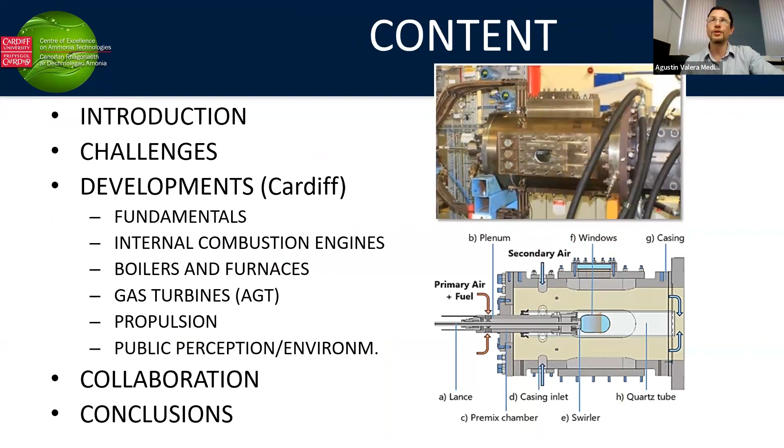So just to give you an insight into what we have done, you have all these lists of things. If you have the time, interest, and will to do some reading, go ahead please. This is some of my background and the work that we've been doing on ammonia.

One of the things I keep reminding the audience is that ammonia is used for salts, and NFL players and weightlifters tend to use it just to stay awake. So probably if you have any nearby and you're falling asleep, just go for some and have a sniff of ammonia to wake up. For those of you that probably didn't know, this is something going on. It's quite interesting how it apparently boosts the energy and stamina in these different groups, NFL especially, to carry on with the work. So yes, ammonia has lots of attractive and interesting features.

Starting with the introduction, we go back to why we're doing all this. We've been talking about renewable energies as a way to decarbonize and reduce greenhouse gas emissions, but we know these sources tend to be intermittent in nature. To give you an example, a few years ago we had a big blackout here in the UK affecting almost 1 million people in the middle of the day. The reason was we were running around 48-50% wind power. There was a problem with the wind turbines and connectivity, and that amount of people in the Midlands lost power. Similar situations keep happening everywhere in the US, Australia, Asia, etc.

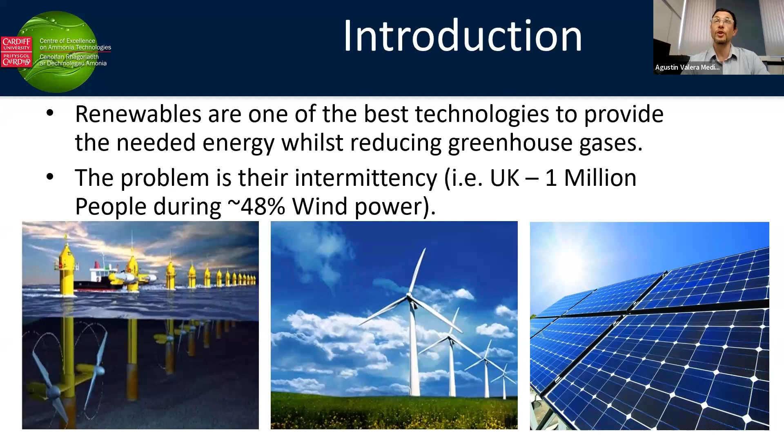So it takes us to the point that we need some way of storing that energy. There have been a lot of methods proposed over the years, some commercial, some fundamental in nature, but there's one that is critical for any kind of mixture we'll have for the future, right now and in the near and long-term, and that is chemicals. The reason is we've been using chemicals for hundreds, if not millennia of years - we're talking about oils, methane, natural gas, and now these days the topic is hydrogen and potentially ammonia.

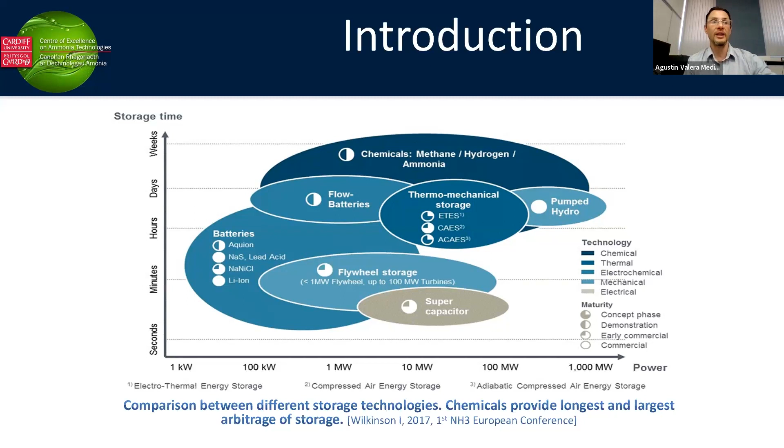Looking at this graph developed by Siemens a few years ago, we can see how storage time, when talking about these different potential technologies, goes from seconds to weeks, and as I mentioned, in the case of chemicals, even beyond that - years, centuries, etc. The same goes for the amount of power they can deliver - not only small power, 1 kilowatt, but actually gigawatts that can be delivered, as we know in power stations and large systems that provide us with the electricity and energy we require.

Now, one of the things I always try to bring up is why ammonia, and then comparing it somehow to what is going on with hydrogen.

This analysis was done in 2021 by the Hydrogen Council, looking into what was the best energy source based on location. In the map on the left, you see the areas with lots of presence of natural gas across the globe. It's not everywhere, but we know there are still some points to tap into these sources.

Different to the case of renewable energy, where we have photovoltaic and wind resources shown in the upper part of the graph, those resources are almost limitless and can be recovered from every location on the planet. And this is just photovoltaics and wind - we're missing marine energy, which has a lot of potential as well in many locations that are near islands or sea locations.

Based on that, and thinking the way forward is going into green hydrogen, one part of the study was looking into how we're going to move that hydrogen. The study focused on three different ways to move it: ammonia, liquefied hydrogen, and liquid organic hydrogen carriers.

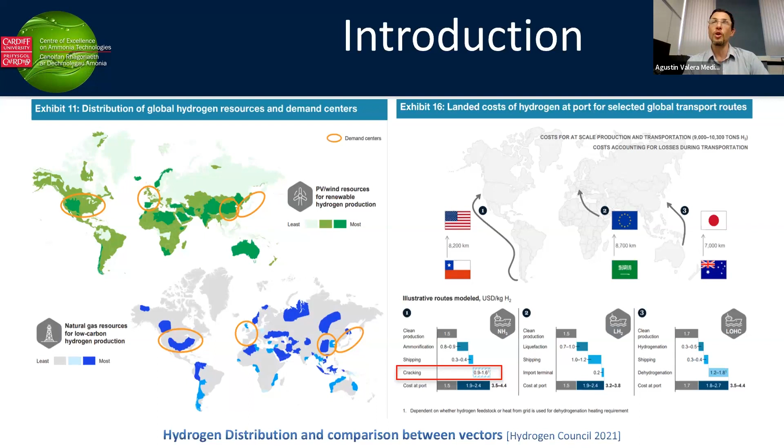But there's one component that makes a whole difference: if we manage to reduce the cracking cost of ammonia - which is almost a third of the total cost of moving hydrogen this way - then for cases where we need to move hydrogen long distance, ammonia becomes the most economic solution of the lot.

That's the reason we present ammonia as a potential method to move hydrogen, a hydrogen vector. Not only because it reduces cost over long distance, but also because we can recover it via renewable sources, and we can recover it using rescued stranded resources from waste streams.

One very interesting thing is that when we talk about long time or long distance storage, the cost of having ammonia compared to cryogenic or pressurized hydrogen is almost 26 to 30 times cheaper. In the same way, we can employ it in islands or isolated locations off the grid.

We can use it as a fuel, as I'll show in this presentation, and we've been using it as a fertilizer for over 150 years. It has more hydrogen than hydrogen itself, because the ammonia molecule has 3 atoms of hydrogen compared to the 2 atoms in the hydrogen molecule. Finally, we have a very well-developed infrastructure, built up over 150 to 180 years, that moves around 184 billion euros annually.

On that line of thought, there have been lots of different methods and materials analyzed to move hydrogen, as you can see on this graph. At the very top right of the screen, where we have ammonia, either refrigerated - not cryogenic, just minus 30 to minus 40 degrees Celsius - or slightly pressurized over 10 bar at atmospheric temperature, it's one of the best methods available to move more hydrogen, again with the versatility of a lower cost.

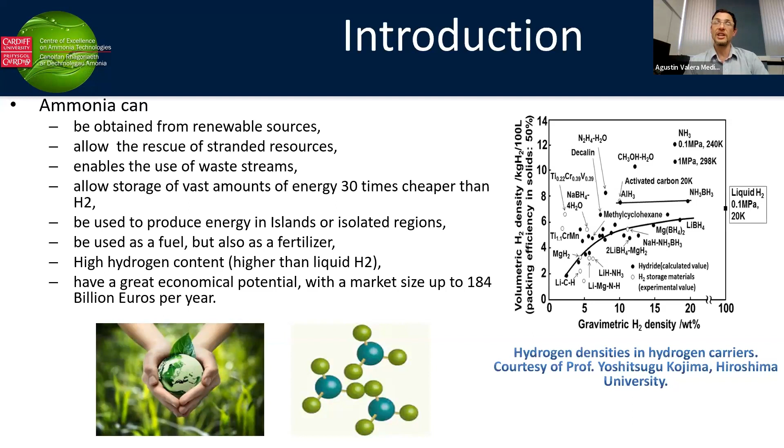There's been a lot of talk about how we're going to manage to produce all this hydrogen, convert it into ammonia, and make it a feasible part of this hydrogen economy we've been talking about. Right now, we're mainly relying on production of ammonia and hydrogen via steam methane reforming. But the next generation, which will start production in the next couple of years with companies like Yara, CF Industries, etc., is looking into producing this green hydrogen via renewable energy.

So we can use electrolysis to produce the hydrogen, and using air separation methods for the nitrogen, put it into reactors in a process called Haber-Bosch, and finally produce the ammonia that we need for fertilizing and now fueling applications. That's what some scientists call generation 2 ammonia.

But there comes a third generation that people are starting to investigate, called third generation, that essentially will start working with surface reactions, fuel cells, lithium-based materials, etc., where we'll have the combination of both water and air, using energy coming from renewable sources.

It won't require the electrolysis of water or the separation of nitrogen, and because of the affinity of these materials with hydrogen and nitrogen, it will produce the ammonia straight away, meaning that anyone in the world, as long as we have water, air, and electricity, will be able to produce ammonia, and from there, the hydrogen that we require.

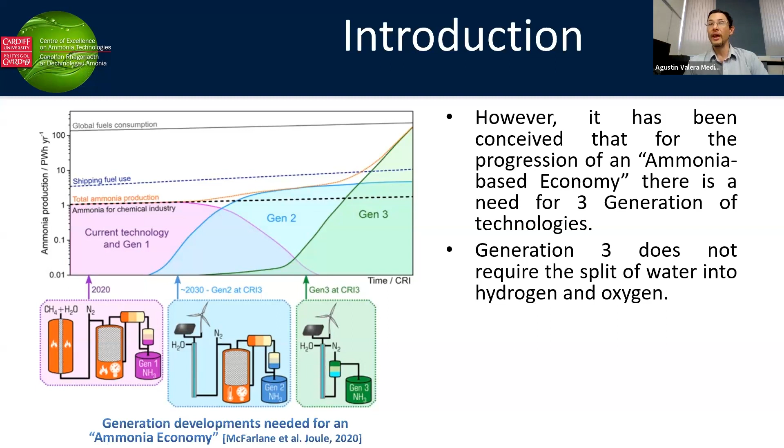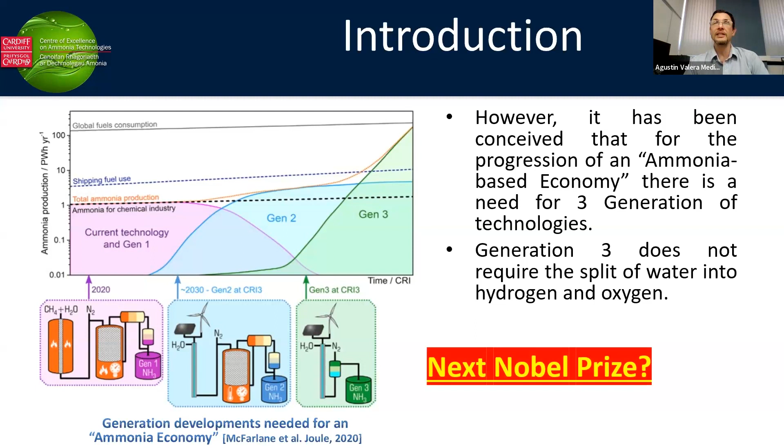So it's probably going to be the next Nobel Prize, as this already has 2 Nobel Prizes in its belt, with the Haber-Bosch process, and it's very likely that if we manage to do that, anyone will have access to store and then utilize ammonia as a hydrogen vector.

For that reason, there's a lot of work going on in different areas. For example, in our case, we've been working on thermal systems. And one of the things I want to point out is, again, this is going to be part of the final solution. It's not going to be the final silver bullet that solves all our problems. It's going to be part of that.

So if we have renewable energy or methane reforming, then that renewable energy probably fits into the grid, providing us electricity for driving cars. Or if we're using fuel cells, potentially providing that hydrogen we can use straight away close to the sourcing point. But if we need to move it around, ship it, and send it long distance,

like in cases in the US where there are long distance pipelines, then it's probably the best way to do it via ammonia. And if that's the case, we need to consider how we're going to employ it for transport, heating, cooling, process industry, propulsion, or stationary power.

But still, there are many things we don't know about and need to investigate. Some of them are related to reactions and combustion, how the addition of nitrogen is going to impact emissions, how it's going to impact the production of this energy via these sources.

We are finding out, as I'll show you later, that there's some nitriding combined with embrittlement when we start using ammonia for these purposes. Public perception is going to be a big one, because people need to understand how this is going to affect them, how they can utilize some of these systems, and be aware of the potential risks that ammonia will bring.

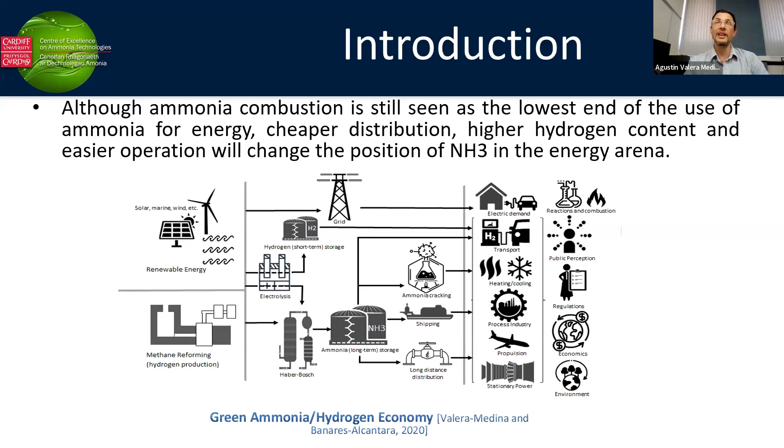Regulations, there are none, again when it comes to fueling. They've been talking about this for some time, but in the international arena, there's still nothing available. Economics needs to be profitable, and finally the environment needs to be addressed as well, because we'll be dumping nitrogen somewhere that we didn't capture, and same thing with water. So how is that going to affect the environment? And again, think that we're talking about gigawatts of power potentially being produced using this vector. So that's something that needs to be addressed.

Along those lines, looking into why ammonia, one of the things we always tend to mention is its energy density compared to hydrogen. Per liter and volume it's obviously higher. And when it comes to long distance, long period storage, it makes sense compared to the case of pure hydrogen.

So shipping, rail, heavy duty lorries will probably be fed using ammonia. But again, as I mentioned, it's not going to be the silver bullet that solves everything. It's going to be just one addition to this hydrogen economy. So hydrogen is going to be there.

So along those lines, some analysis that's been done looking into the use of hydrogen and other vectors, done by the University of Louvain, tried to demonstrate that by renewable energy production and then passing through all the different processes of electrolysis, storage, and efficiency of a final engine, the case of ammonia was very tempting.

You can tell from the comparison between methanol and methane that ammonia is actually quite close in terms of final efficiency. What is the main problem with hydrogen? Again, it goes back to cryogenic storage. If we're avoiding that part of the component analysis, obviously that final percentage comes much higher.

It just doesn't make sense to convert the hydrogen into ammonia. But if we need to move it around and store it rather than going cryogenic, we can go and produce some ammonia.

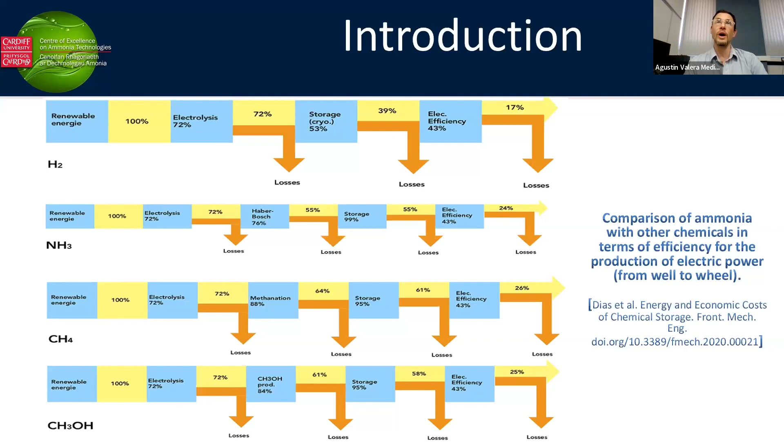Finally, some analysis done by the University of Minnesota, addressing what would be the best scenario to employ either hydrogen or ammonia in different places across the US. So they compare three different scenarios: one hydrogen, the other ammonia, and finally a combination of both.

Based on the location of the city, say for example Minnesota or Wyoming, in the Midlands and central part of America where you have more resources for farming, ammonia makes more sense than having probably pure hydrogen. Whereas if you're next to the coast with an offshore wind production system for hydrogen, then hydrogen could be the best option.

So they address that depending on the location. And you can tell that based on that, some locations were more prone to be efficient or lower cost when it came to ammonia or hydrogen.

But when they combine both of them, it was the best scenario possible, because what happens is that you reduce your capex, your capital cost involved in producing the ammonia, so you will require less ammonia at the same time that you require less infrastructure for the production of hydrogen.

Having a combination of both, then selling additional ammonia and using that for storage, and employing hydrogen directly in systems that can use it instead of reconverting it into ammonia and then back into hydrogen, made the best economic case.

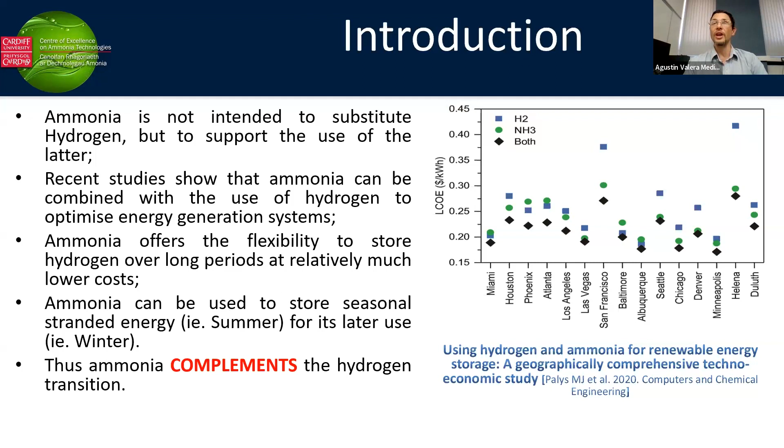So a beautiful and very interesting analysis, which means that if we use that ammonia for, say, seasonal storage, or we have stranded energy, then potentially it's the solution to complement hydrogen. So the way we see it, both of them will complement each other, and that will make for a lower cost of the existing technologies we have at the time.

On those lines, the International Energy Agency in 2018 finally addressed ammonia as an energy vector. Before that, if you go to 2017, 2016, etc., you won't see anything related to ammonia apart from fertilizing. But in 2018, it was finally addressed as one of the components of the energy mixture we'll have in the future.

Many different agencies across the world have been taking this rationale and jumping on the train of ammonia as part of the energy mix. It's starting from the Japanese, who have invested in a very large program working on ammonia, and the same here in Europe and the US. We know Australia is one of the big players, and now we're hearing from developing economies like Chile, Morocco, India, etc., moving into this similar scenario.

So along those lines, we have different ways to use it. Once we have produced the ammonia, we can employ it in fuel cells, can be used as well in internal combustion engines, especially for heavy-duty processes, combined cycle gas turbines, and finally furnaces and boilers, which have shown the best demonstration and the largest efficiencies of all.

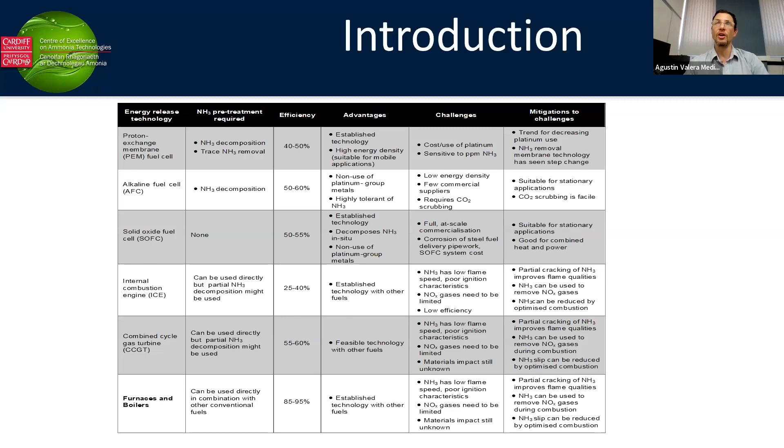But we have challenges. The challenges are mainly four. First, we need to produce it carbon-free, and there needs to be a cost reduction and efficiency improvement, because at the moment the production of green ammonia is still very expensive.

As we have it the same way with green hydrogen, green ammonia, because it comes from that green hydrogen, is very expensive. One of the most expensive components of the total system is obviously the electrolyzer, and then the Haber-Bosch process is just a regular process that can be employed from fertilizing industries. But it's that cost of hydrogen that still makes an important impact on the cost of the final ammonia product.

Power generation at utility scale needs to be stable and low emissions. We are still facing the production of NOx emissions that I'll mention later. They are not that bad. Actually, some of those are within the threshold. We're talking about high power outputs, but still we need to bring that down even further.

Public perception and acceptance is a major barrier because people keep conceiving ammonia as a toxic chemical, that it is. But then the thing is that we've been working and using it for over 150 years, and many refrigeration systems are now running on the use of ammonia. So we know how to handle it.

Problem is that it's not for everything. It's not going to be fed into pump stations where everyone can have access to it. It will require training, will require acceptance, and then community engagement to actually make it happen. The economics, as I mentioned, need to be profitable. Otherwise, there's no way around these technologies.

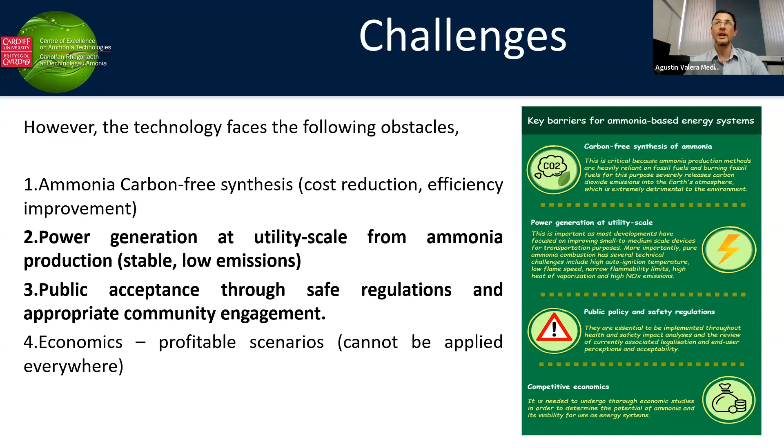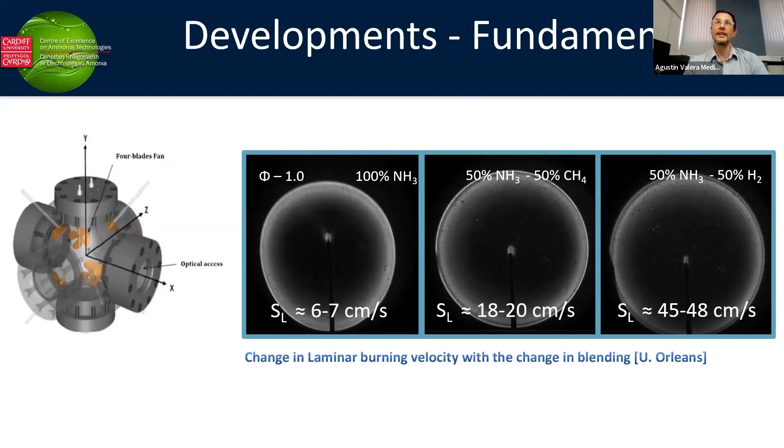How are we going to then input hydrogen from that ammonia? Well, cracking the ammonia. So if we crack the ammonia, we can then recover some of that hydrogen and then use it to then boost the properties of pure ammonia. So instead of having something that is very dull and slow, we can have something that is close to what is natural gas.

Along those lines, there's been loads of research looking into how we can then analyze and understand the reaction mechanism using ammonia and ammonia blends, and the work that is out there is massive. Just to give you an idea, some of the things that we have been doing, look into the analysis of 86 different reaction mechanisms that contemplate, to some extent, ammonia combustion.

But the problem is that we still find that many of them don't provide reliable results. So they work nicely under the conditions that they were generated or designed for, but then when it goes outside of those conditions, then everything starts going bad.

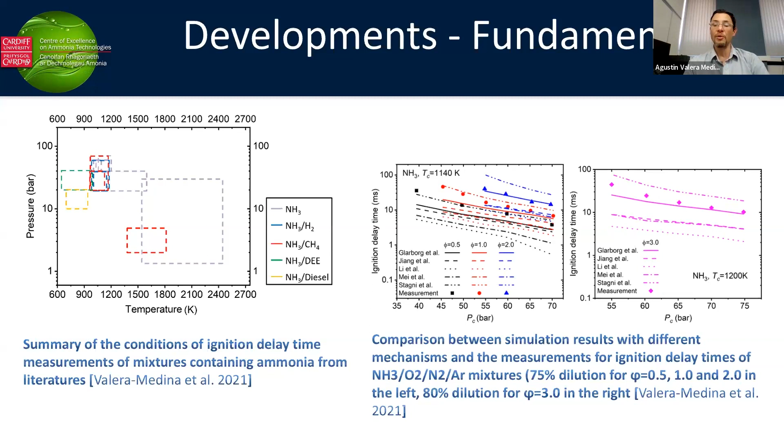So some of them will be really good. Some others will just go and then provide zero correlation to what experiments are providing. So again, it's just a very interesting, nice area of research where we have loads of different researchers working on as we speak.

Similarly, one of the things, as I showed in the propagation of these flames, is how would be the impact of hydrogen as we add it into ammonia. So one of the things that people have been experimenting on is this propagation of the different flame fronts. And as we start adding hydrogen, then what will start happening is something called hydrodynamic instabilities.

And you can see how the change in the bubbles that we had at the very top with very low amounts of hydrogen are very nice, consistent, and propagate in a uniform form. But then as we start increasing the hydrogen content, then what will happen is that we'll produce wrinkles along the flame. And those wrinkles are going to then propagate and produce loads of instabilities that can potentially lead to the hydrogen taking over the flame.

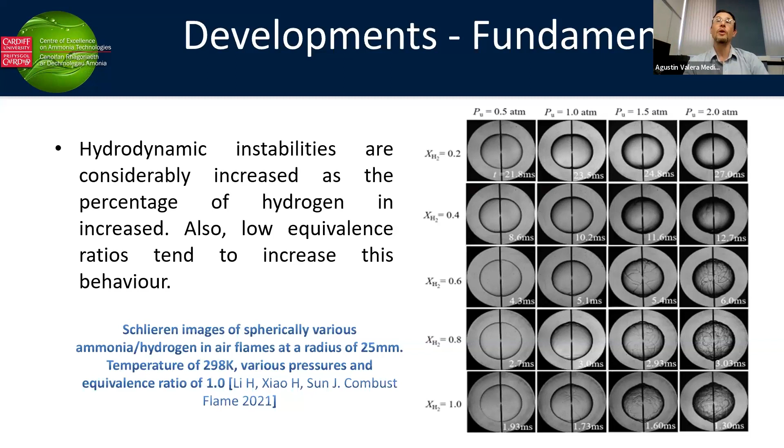And if that's the case, it's very difficult to control. We'll have lots of different issues that will impact on what we call instabilities. So the instabilities will be the propagation of the flame inside of the combustion passages. So as we start adding more hydrogen, then what will happen is that we'll just flashback, and then that potentially can lead to disaster.

Now, another thing that is really interesting is that once that we start adding more or less ammonia, then the flame will change because of the radical formations that we'll get. And this is something that is very tangible, as many people have been looking into this propagation of different flame fronts as, again, the change of the radical formation. So on my left, you have all these analyses using different amounts of ammonia. And when we have zero ammonia, we have a nice bluish flame as the ones that we have in our ovens or equipment that we use with natural gas.

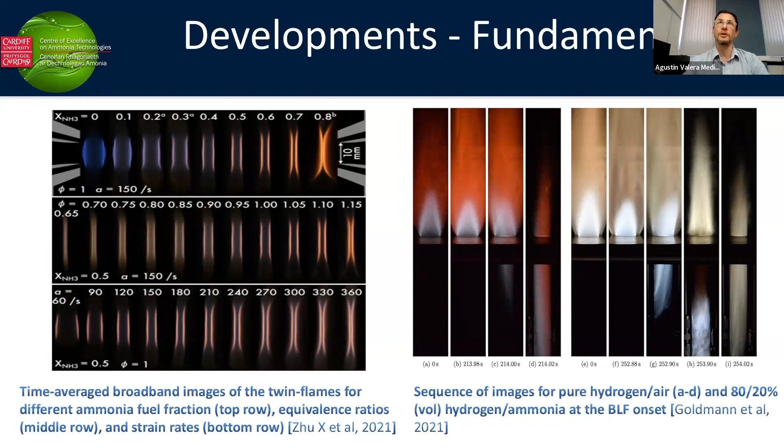But as we start increasing that ammonia content, it will go more into the orange spectrum because of the radicals that we're forming. Those radicals, we need them to finish the combustion and provide enough reactions to annihilate the NOx that we're producing. So that's something that has been studied.

For example, we have a very good collaboration with the University of Orleans here in France. What they've been doing is looking into how the mixture of ammonia, hydrogen, and methane can change that reactivity.

One of the things that was really interesting coming out of that study is how much hydrogen or methane we're allowed to put in before we start seeing massive changes in the stability and flame reactivity of these blends. They found that when we pass 20%, we start suffering big changes between one composition and another. So if we go with 20% hydrogen or 20% methane, we can still use the same type of system.

So the same burner, the same nozzle, the same gas turbine potentially could be used if we replace just 20% of hydrogen with 20% of natural gas, and the other way around. But if we pass that point, things start going differently, and we can potentially have these instabilities occurring in our system.

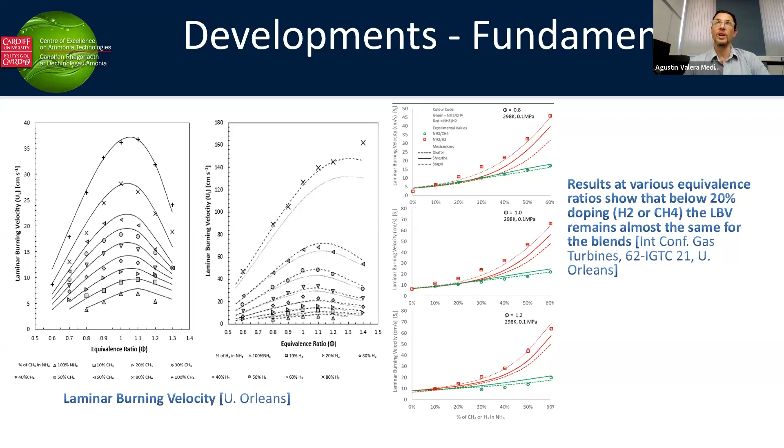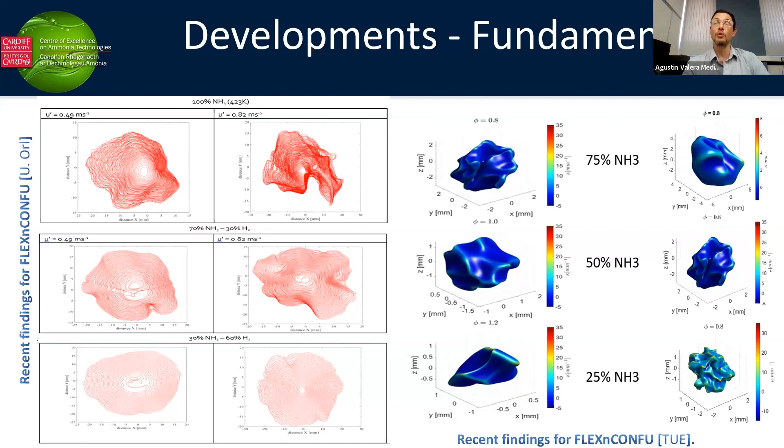In the same way, once we start mixing up some of these blends, they will produce hydrodynamic instabilities. That's the case, for example, in some of the numerical simulations that our partners from Eindhoven have been doing: with very high ammonia content, the instabilities are reduced—they're there, but not very acute—whereas if we have just 25% ammonia compared to 75% hydrogen, the instabilities are massive. So again, going back to combustion, the use of hydrogen is very challenging just because of these instabilities that we know happen when we start burning it.

Another interesting thing is people talking about using ammonia through direct injection. Because as I mentioned before, once we get it at minus 30 degrees Celsius, it will be liquid. Or if we just slightly pressurize it at 10 bar atmosphere, the same phenomenon will occur. So why not inject it directly as liquid?

That's one of the areas that several universities, including us, are now looking at—how we're going to inject it in a way that will be efficient and will allow us to provide power systems that are reliable. This applies to internal combustion engines, but also extends to systems based on aero design, so aero gas turbines.

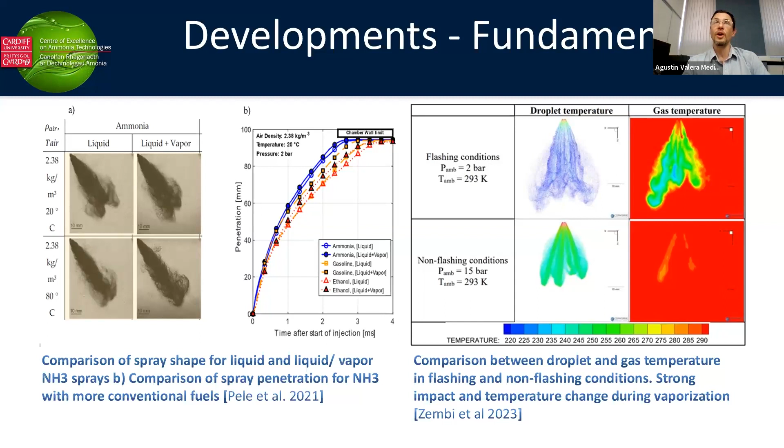So if that's the case, we have some scenarios where we are close to that flashing point, and things will start getting very chaotic. But if we are far away at higher pressures, then that can be controlled. So that's a subject we are now evaluating, and some other universities are also analyzing.

In the same way, what if we use some of that oxygen that we recover from the electrolysis process and put it into the combustion of this ammonia with some other species? Some work has been going on, especially when it comes to natural gas and coal, because coal is a very important factor now, especially in Asia, that is being replaced using ammonia.

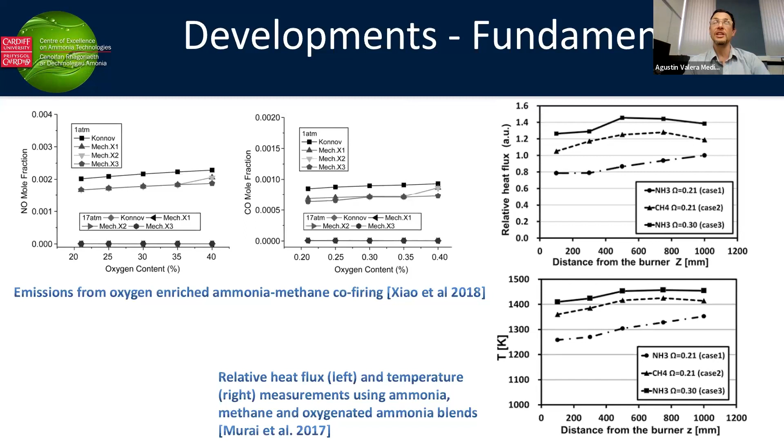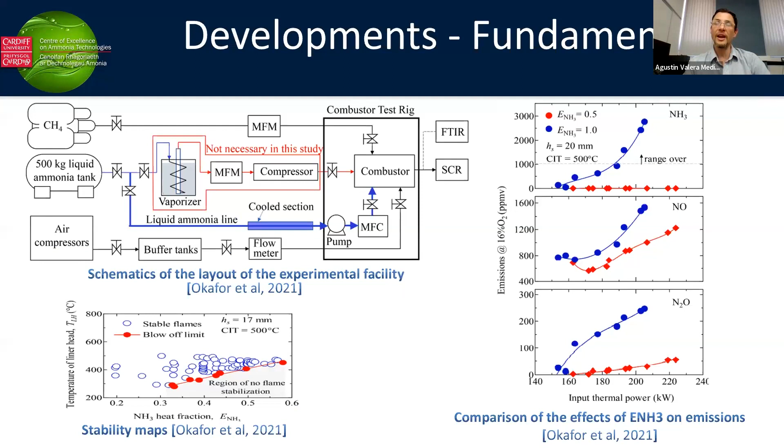The results are very encouraging, because what they show is as we burn ammonia and coal, if we oxidize it even further, the amount of heat flux and radiation from those blends is even higher, increasing the efficiency of power plants. So looking into the areas of injection, there's a lot of work going on, but there are still problems regarding emissions because we don't have the efficiency we got when we vaporize it. So again, an area that is very interesting—this one on NOx emissions.

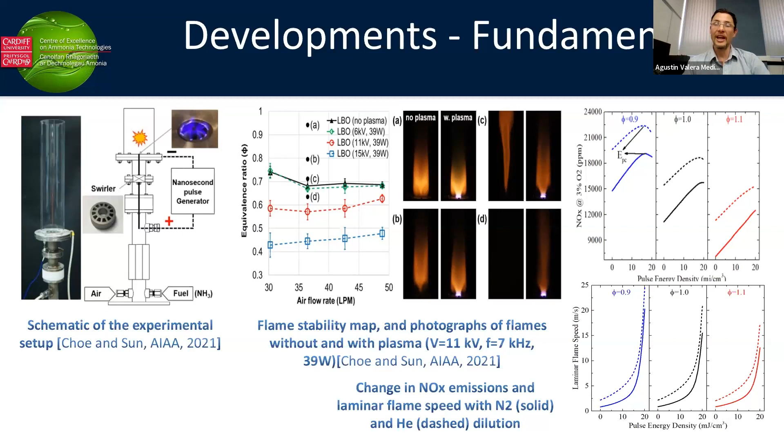There's been a lot of work on plasmas. If we start employing plasmas to produce radicals upfront of the flame, we essentially get everything ready to start reacting before reaching the flame front. This produces a reduction in NOx emissions and an increase in stability. That's a fascinating area that just started a couple of years ago, led by Georgia Tech and other universities in Saudi Arabia.

Some other developments, passing the fundamentals, are more in practical applications, internal combustion engines. We have an engine in Oxfordshire developed to burn hydrogen and ammonia, hydrogen at 30%, ammonia 70%, that is quite stable.

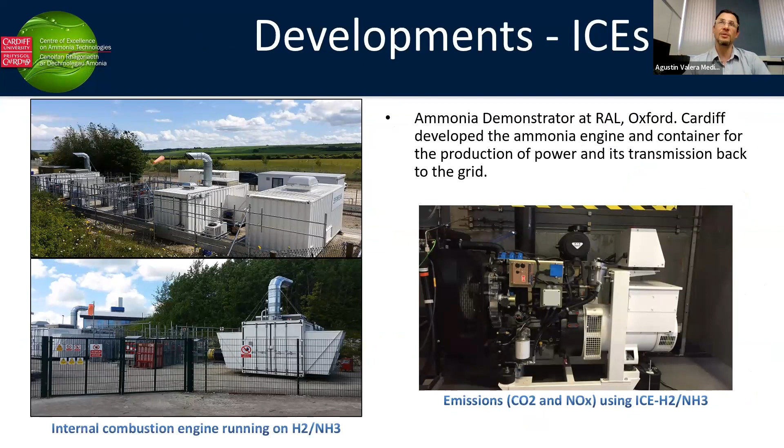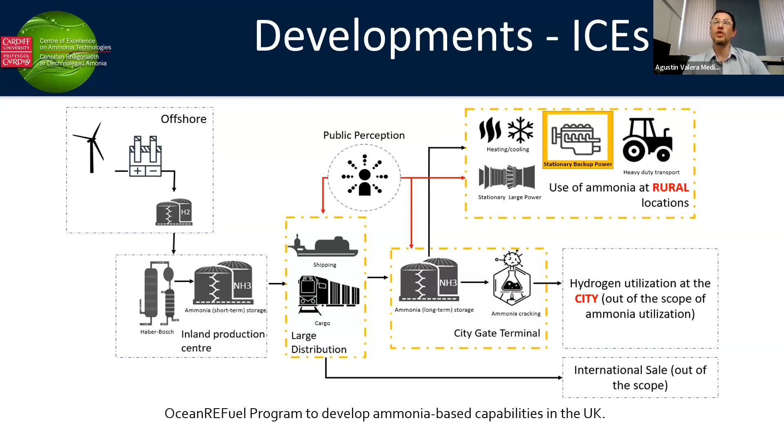That's something that the US is probably ahead of us on here in Europe, in terms of legislation and environmental policies, depending on the sites. It's something we need to learn about here in Europe, especially if we're going to think about having heat, cooling, stationary power, and heavy-duty transport using this chemical in rural places.

There's been a lot of work going on in internal combustion engines since 1933 up to these days, where research institutes and companies are now jumping on the train of using ammonia as a hydrogen provider. The latest is the use of ammonia for trucks moving heavy loads in Canada.

In the same way, marine applications are probably making the biggest noise, because most forecasters believe that a third of all fuel by 2040 is going to be ammonia-based for these applications. We already move ammonia using shipping, so why not use it for fueling applications as well?

There's expertise already, and now the idea is to develop engines that are efficient enough to provide stable operation while also reducing emissions and the impact risk to the personnel and staff on board. And finally, as I mentioned, farming and heavy-duty applications.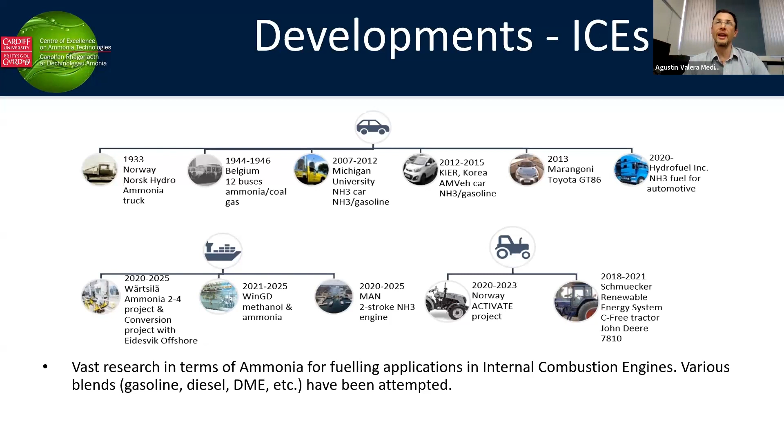There's a lot of work, especially in the US, by the University of Minnesota, that is leading some of this work in combination with diesel and ammonia injection.

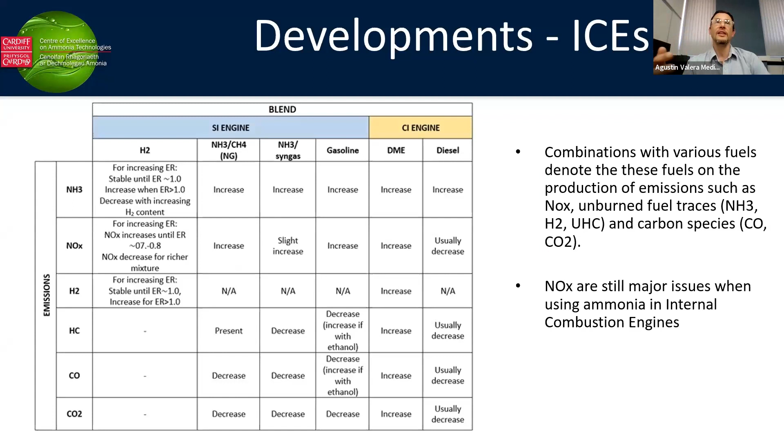There are a lot of different aspects that have to do with internal combustion engines, from spark ignition to compression ignited. Depending on the situation and the blend we're using—either hydrogen or ammonia with syngas, or with gasoline, DME, or diesel—the emissions and performance will change. It's a very interesting area of research, showing that depending on the amount of air and fuel, and the pressure in the engines, our final efficiency will change.

These are just examples of work conducted at the University of Orleans. We also have a program with the University of Nottingham where we're looking into developing our own marine engine, and the numbers are very much alike to this one.

You're increasing the NOx emissions as you add more hydrogen, but what happens is the final ammonia unburned goes down because you're improving the reaction. So how do we manage both of them?

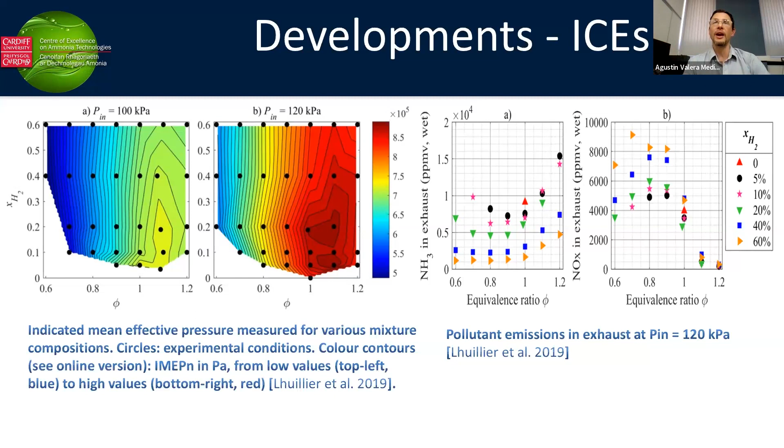There are a lot of thoughts and ideas, like spark-assisted compression ignition, homogeneous charge compression ignition, and also stratified charge ignition. These are some of the works and results produced by the University of Nottingham, showing how if we increase the pressure and RPM of these units, we'll improve the efficiency and reliability of these internal combustion engines.

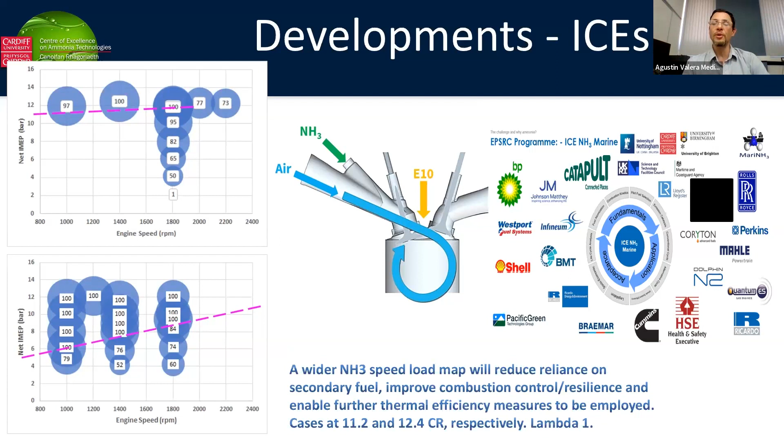So our final objective is to have one that will be able to be set up in a marine environment and run for a long period of time.

Some of the work that has been done as well, some of the colleagues that we got in China are looking into how to inject different amounts of ammonia via normal gaseous injection, then using spark plug assist or even jets. Depending on the nozzle configuration, the geometry that they're using for the system, the combustion efficiency will increase, the combustion duration will decrease, and the impact of these blends on the final material will change.

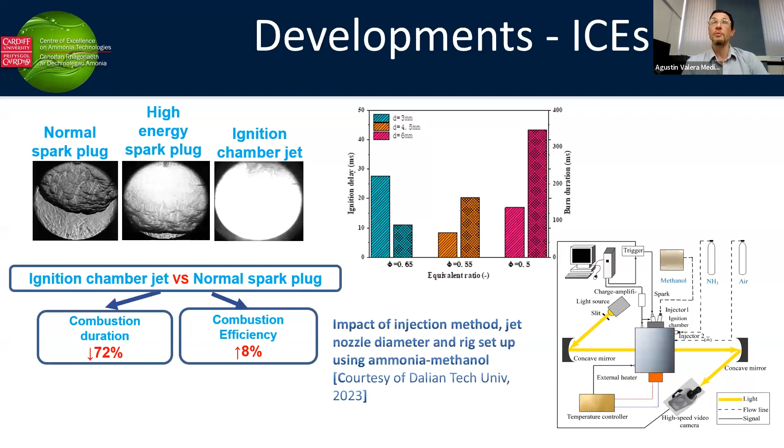So again, it's an amazing area of research. We're still learning about it. Each of these simple scenarios requires its own time, its own dedication, because again, there's lots of things that can be learned from any of them.

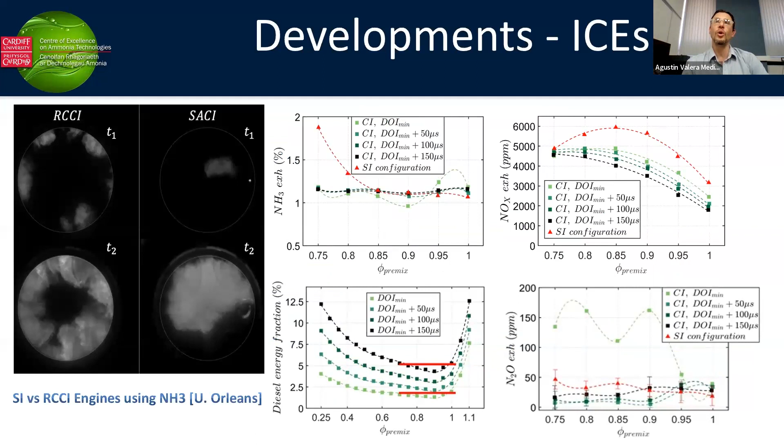So here are some of the results showing the difference between having RCCI and SI, the reactive control. It shows from the University of Orleans that as they are increasing the amount of ammonia, the pre-mixing that they're doing, and also the duration and delay of the spark, that will have an impact on the final efficiency, the final amount of diesel, and the N2O that we will produce. So again, a fascinating area that has lots to give for the near future.

Development in boilers and furnaces is another area that we are looking at, and it's a very promising one. It's probably the one that is going to be, for our thermal system, commercially available in the near future.

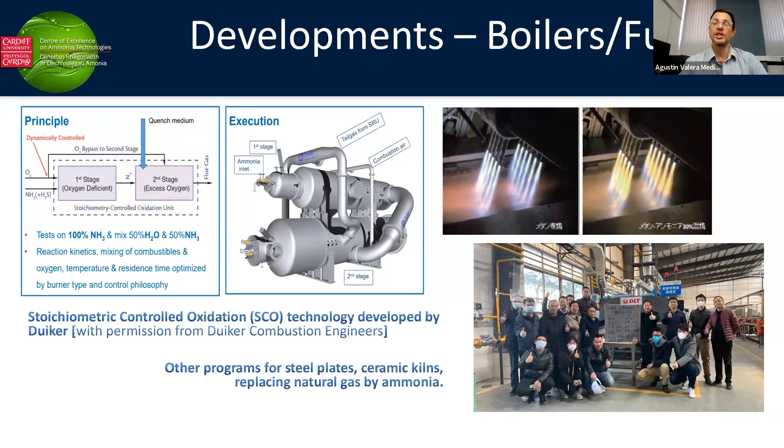I show you here a photograph from a Chinese group in Foshan, where they demonstrated the first ceramic kiln worldwide using ammonia, pure ammonia. They have a system that is producing these units, and apparently they have between 30 to 40 companies just in the region ready to start switching from natural gas to this fuel.

Along those lines, we are doing something similar here in UK. We have a project looking into the replacement of propane, because propane can be stored at minus 30 degrees Celsius, very close to the way that we do it with ammonia. The way that we evaporate it, move it, and handle it is very similar. That's one of the reasons why many companies working on propane are thinking that ammonia could be the potential solution to replace fossil fuels.

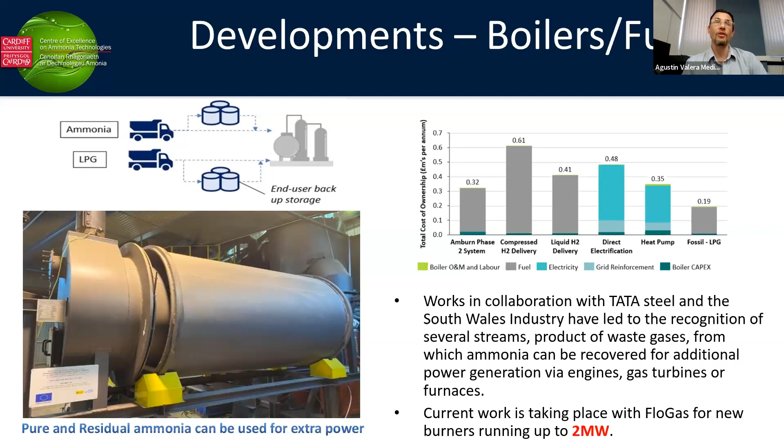Results from economic studies and initial analysis doing combustion show that we can do that very efficiently. So right now we're in the process of running a 2 megawatt power boiler that we're replacing and developing, with the aim of having it functional in a poultry facility here in the UK in a year and a half from now.

Some of the work that we have done as well is using humidification. We tend to add some water into this, and that reduces even further the emissions. Now, one of the points that we always get is, yes, that's going to reduce the emissions because you're reducing the temperature, a point in combustion related to thermal NOx emissions, but that's not the case.

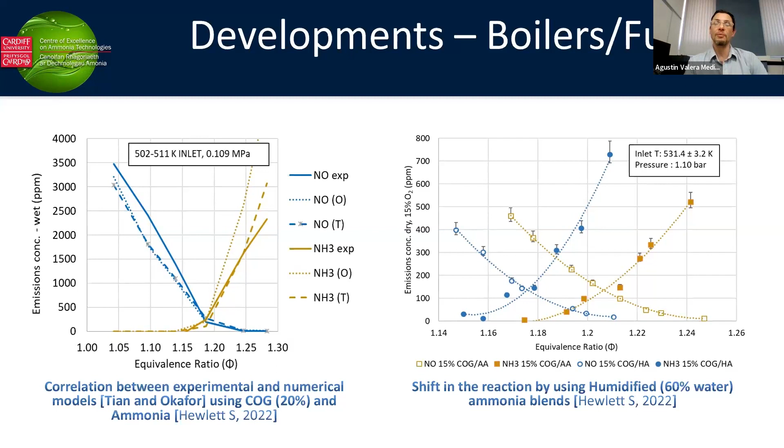In our case, we're running at a slightly lower temperature, but most of our emissions come from the fuel. This reduction of emissions actually comes from the production of hydrogen and oxygen radicals that are adding to the mix of radicals close to the flame, which start bringing down those emissions. So it's got more to do with the chemistry than with the temperature.

In the same way, one of the things that companies in Japan are doing, and now in China, is replacing coal by ammonia. I'm talking about power plants that are 1.5 gigawatts in power. The latest was 3-4 months ago: Japan, a company run by JERA, has announced that they replaced 20% of their coal in their power plant, around 1.5 gigawatts power replacement, purely on ammonia.

The reason for that is that, as I showed before, we have all this reduction in emissions, and the same unburned ammonia coming from the stack is reacting with the NOxes produced by the combustion of coal. In that way, both of them are annihilating each other and bringing down the emissions at the same time.

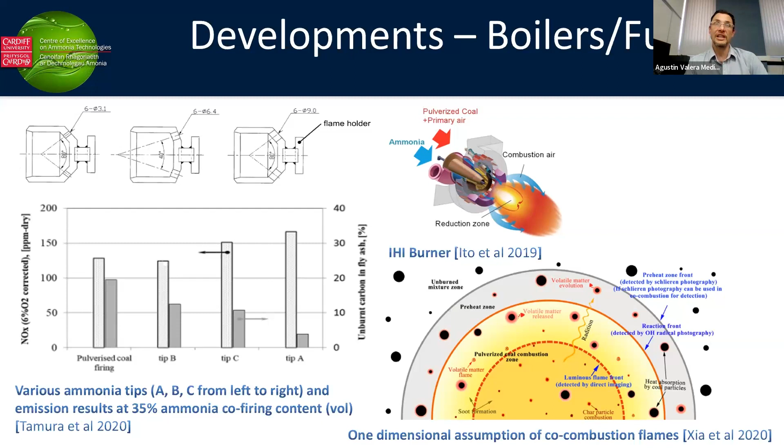How is that going to affect the systems, the materials? We still don't know, we're learning about it. But the idea is that by the end of this decade, they're planning to have a 100% ammonia running facility that was running on coal just 2 years ago.

Then we have some other areas, very interesting gas turbines - that's our main trade. It was really interesting because at the time we were presenting some of this data, Japanese groups were also presenting it in the same symposium, so it was nice to see that independently we showed similar trends.

Essentially what we're saying is that if we run with a depletion of air in these combustion systems, we'll start producing lots of hydrogen, and that hydrogen is going to be potentially burned in secondary zones. So we finish the combustion in what's called multi-stage combustors, because the second stage is essentially a hydrogen stage of combustion. If that happens, the emissions are extremely low, the power coming out is extremely high, and we have a conversion efficiency of these systems higher than 99%.

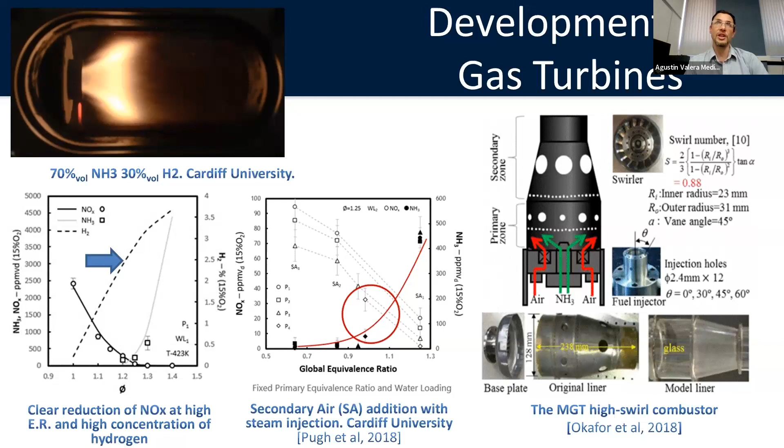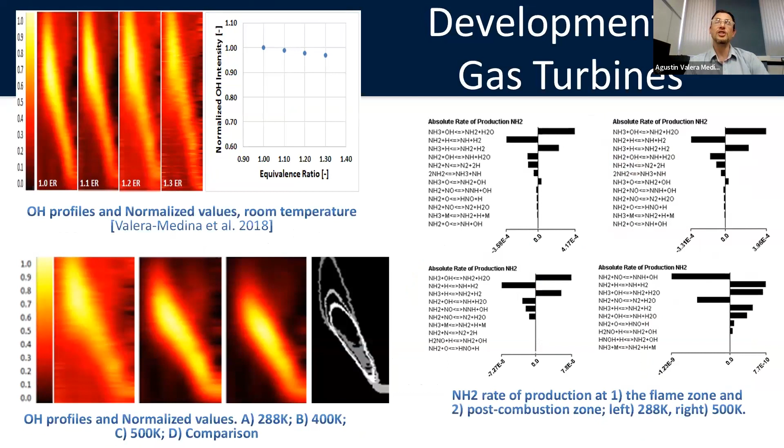Along those lines, we've done lots of different analyses based on the flame and how it reaches different locations. As I mentioned, when it comes to the flame front, it usually tends to be the same depending on the conditions we're using - it can be retracted, the flame a little bit thinner, etc. But it's this post-combustion recirculation and post-combustion reaction that we want to enhance to then bring down the NOx, and that's doable without having to use selective catalytic reduction.

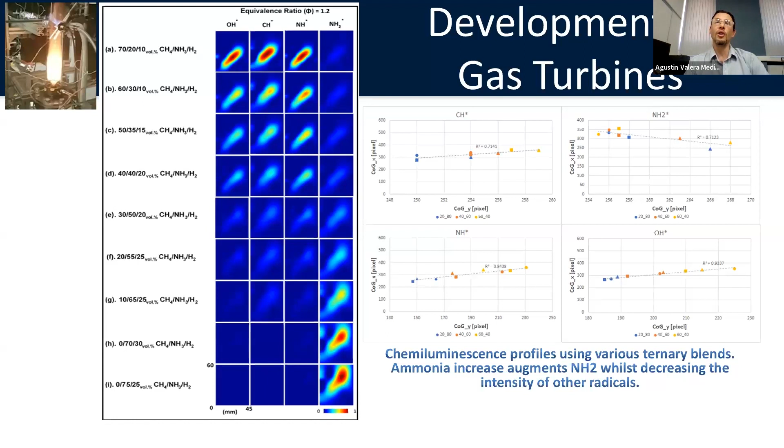Along those lines, we're looking into the position of those flames and how radical formation is going to impact this reduction of emissions via the recombination of radicals. The ones that are more important for us are OH, CH, NH, and NH2, and depending on where they're located, we're targeting those areas to bring down the emissions. That's something we're doing at the moment.

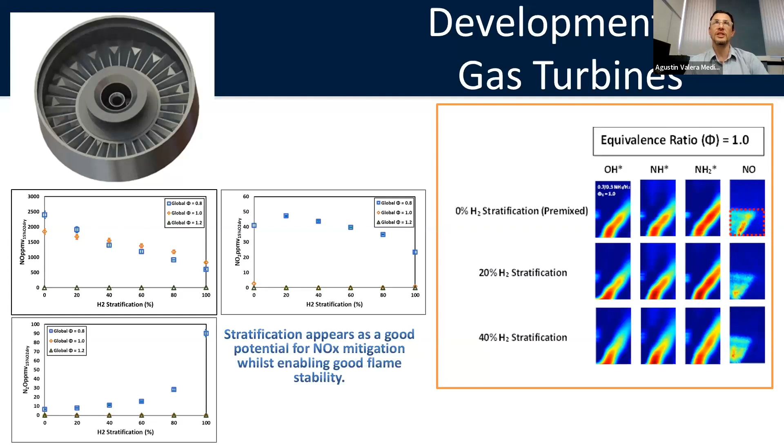We are using stratification and developing our own burner. This photograph is a patent we just got granted three months ago, and it shows how using stratification, location of these radicals, and proper control of temperatures, we can manage to bring down the NOx you'd get from these combustion systems.

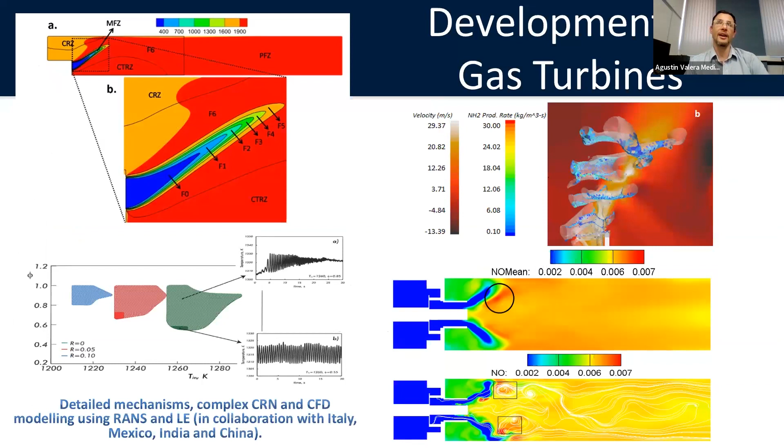And that's being supported by all the CFD modeling we've been doing with partner institutions. We work a lot with universities from India, from Europe, from Japan, and we're also starting now to work with the US on this front.

Another topic that's really interesting when it comes to these thermal systems is material science. One of the main problems is that people haven't addressed this point yet - it hasn't been a problem for any manufacturer. So we started working on this, looking into how hydrogen and ammonia could impact the different materials we were using, especially for gas turbines.

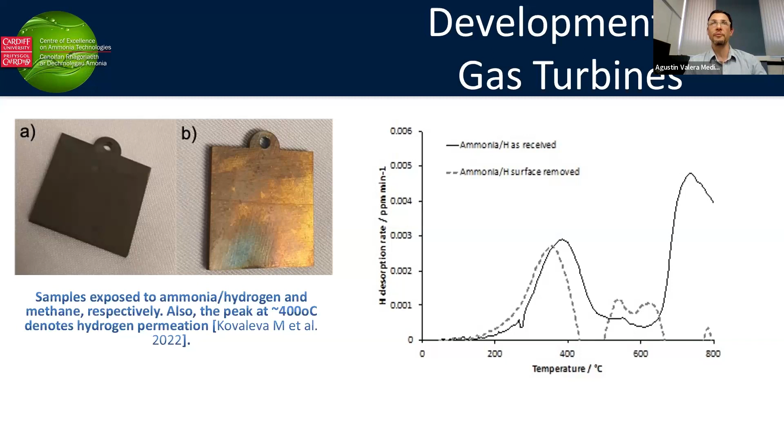You can see from this photograph that A has been exposed to ammonia-hydrogen, B to methane. There's a massive change in the reaction happening at the surface level and just below it - it's a combination of nitration and hydrogen embrittlement. So if we have gas turbines as they're designed now, with the materials they've been using, employing ammonia or hydrogen, then a combination of nitration with embrittlement will annihilate or destroy the components - I'm talking about gas turbine components like combustors or turbine blades. So it's an area that requires a lot of research.

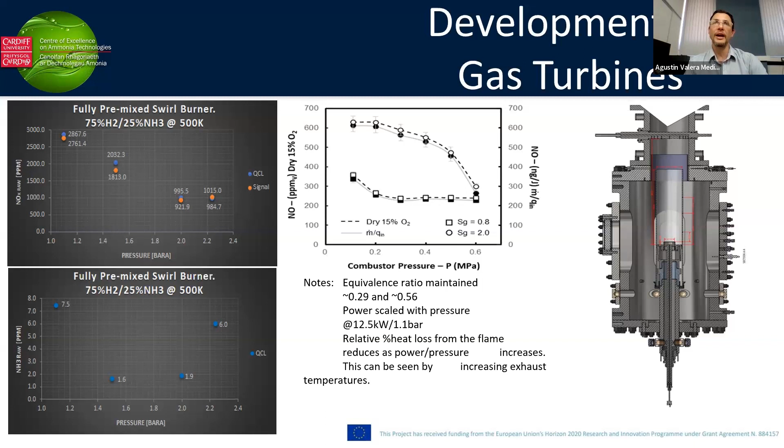Another part of the research we're doing is looking into high pressurized systems - evaluating, as in a gas turbine, high pressures. One thing we're observing is that as we increase the pressure, NOx emissions come down. Another interesting thing is that as we increase the swirl or recirculation of these species, that also impacts NOx abatement. So again, lots of areas to do analysis on.

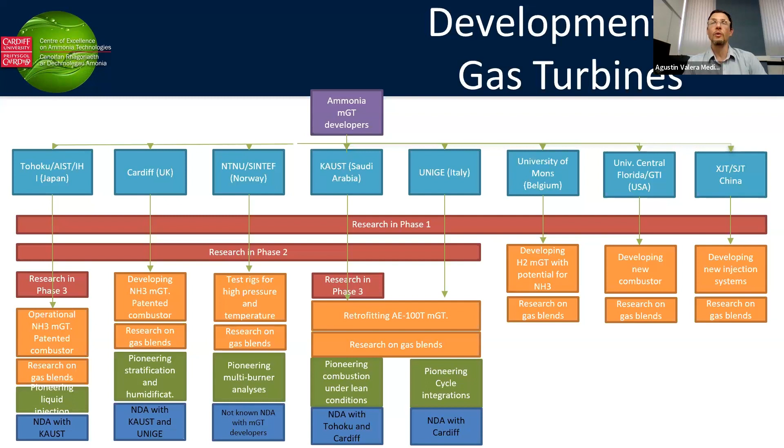These are some of the players developing micro gas turbines right now, mainly based either in Japan - some are now showing up in China. There's been a lot of work here in Europe, and there's now talk that in the US, a combination of Central Florida and GTI in a joint program will develop their own. This is an area that requires a lot of research and development, as it can be one of those points of application where we can develop these units for farming or stationary power.

Some other areas that are also of interest are propulsion. As I mentioned before, ammonia has been considered as well as a propulsion fuel.

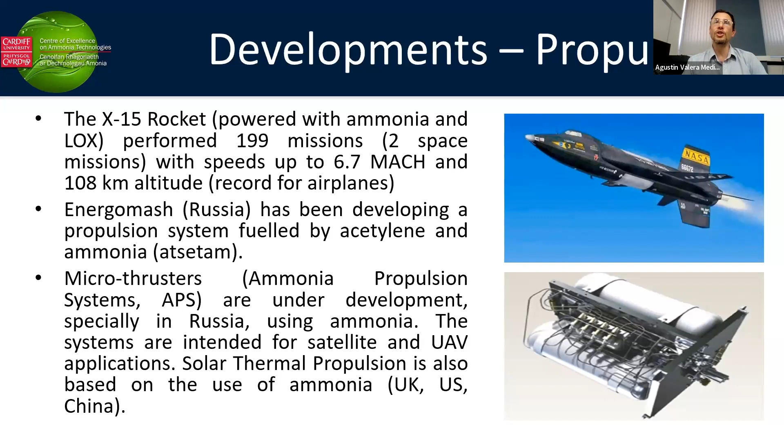This goes back to work that the US and NASA were doing a few decades ago. The X-15 rocket program was actually developed using liquid oxygen and ammonia, and the velocities they reached, almost to 7 Mach, were never beaten until the shuttle was released a few years later. Russia, China, and some other economies are already using ammonia in satellites, but the idea is that eventually we can use it again as a replacement for kerosene.

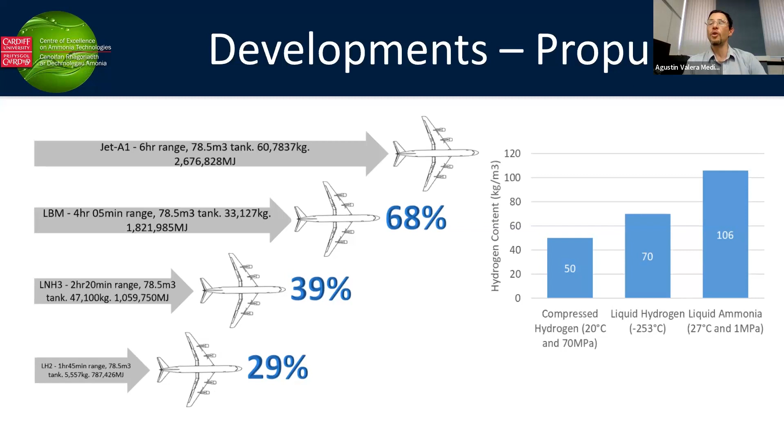Here is a comparison between what would be a liner running on the same amount of volume with either jet fuel, liquid biomethane, liquid ammonia, or liquid hydrogen. The comparison shows that among zero carbon fuels, ammonia will be superior to hydrogen. It's based on what I mentioned before: the amount of hydrogen we're carrying using liquid ammonia is much higher than what we'll get using either liquid or compressed hydrogen.

That opens lots of different aspects to then use that chemical. Some thermodynamic analyses have shown that it's doable. It's going to be closer to what we got with kerosene, but at the same time, it shows that a combination between ammonia and hydrogen could be the most feasible solution.

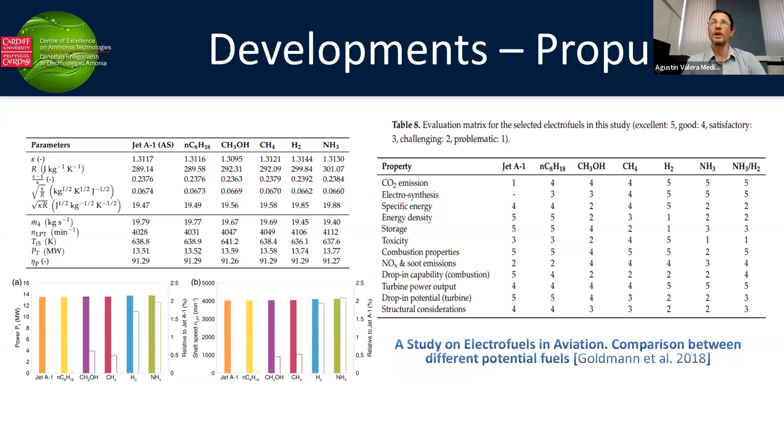The table shows, from 5 being very good or excellent to 1 being very problematic, what the issues are when it comes to the use of these blends. As you can see from the combination of ammonia and hydrogen, the very last one, toxicity becomes the major issue. So in thinking about ways to handle it, store it in case of a catastrophic situation, what would be the case to reduce and minimize all that exposure of ammonia being released?

So it's one of those points that when we talk about toxicity, and this is something that has been covered by the Ammonia Energy Association, is that it's actually not toxic for humans, but actually corrosive. Because if we get exposed to one of these clouds, what's going to happen is that our throat probably will burn before we actually can inhale enough ammonia to die. So it's going to be the burn of our throat that kills us, again due to the lack of breathing.

In the same scenario, it can produce explosions. And if it's pressurized, then sudden release can create a mist, a deadly mist that can lead to these scenarios. But at the same time, one of the things that is very interesting is that although we have these potential fatal scenarios, the case of ammonia is quite good compared to some other chemicals.

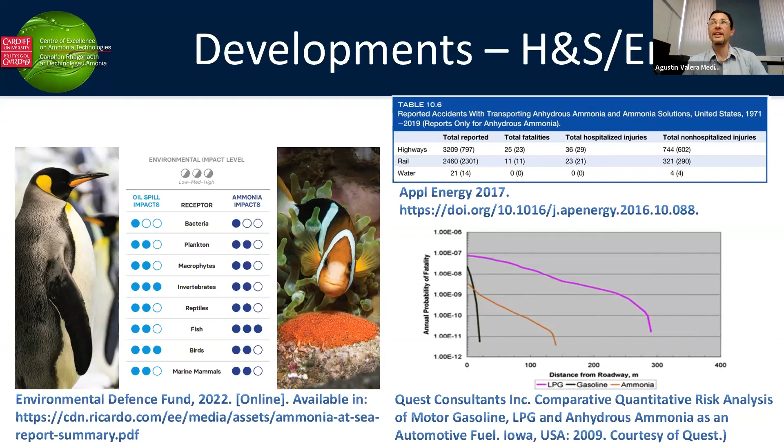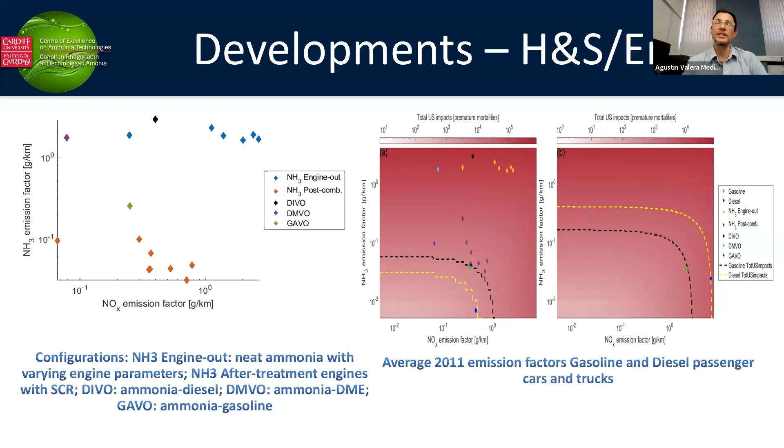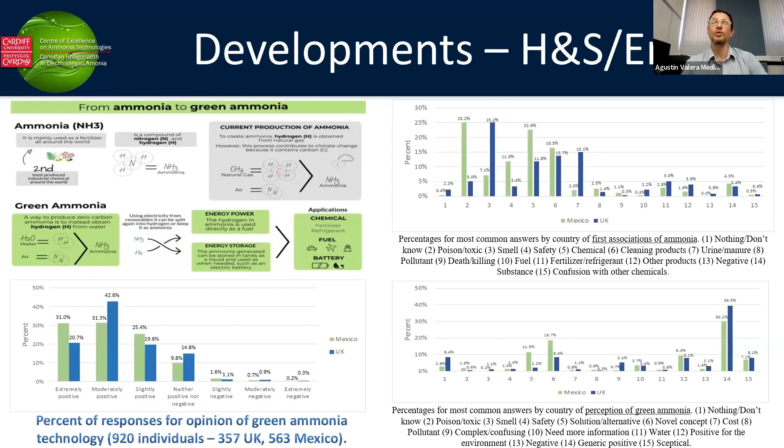So where are we going? We're going into potentially having large power stations, as I mentioned, gigawatt power. We're talking now 2025, 2026, Mitsubishi having the first pure ammonia gas turbine powering up to 40 megawatts. NASA with Georgia Tech and Florida developing a Boeing aircraft that will be burning ammonia, using ammonia as a method of transporting hydrogen, and then providing for the cracking using waste energy.

And then finally, some ideas that are just coming on board: ammonia will eventually be produced offshore, and then it won't touch the coast, it will just go to its final destination.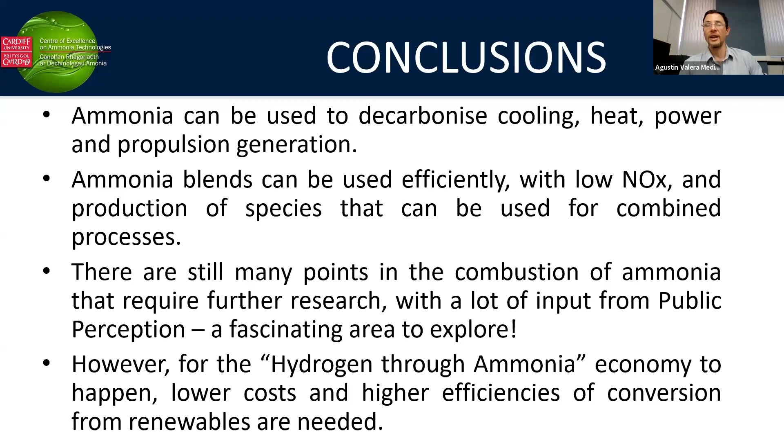So as a conclusion, ammonia can be used to decarbonize cooling, heat, power, and propulsion. We need to do it efficiently with low emissions, and we need to understand how we're going to manage all these combined processes, because it can be done, as demonstrated by coal combustion. There are still many points we need to address, especially when it comes to combustion and thermal systems. So it's a fascinating area to explore, and we believe it's going to be part of this hydrogen economy, something like hydrogen through ammonia, that will support us in getting to that final decarbonization for the world. Thank you very much. Is there any question?

Fair question, yeah, that's a very good question. Actually, the model analyzes and uses the current mobility of ammonia, as I mentioned, it's the second most commercialized chemical. And you're right, one of the things, when we start thinking about ammonia as a fuel, then it's probable that we'll have to think in ways that we can handle the amount of ammonia we're moving around. One of the main problems that happens, for example, in China, is that they suffer a lot with tankers. They don't follow regulations, and then suddenly have accidents, and that obviously spreads all the ammonia and ends up killing between 10-20 people in one incident. Whereas in the US it is not the case, because speed regulations are more strict and followed than in China. But if this becomes something that is widely developed and provides a fuel for the future, then we'll need to find some other ways to do it, different from what we have been doing. So yes, the size will matter.